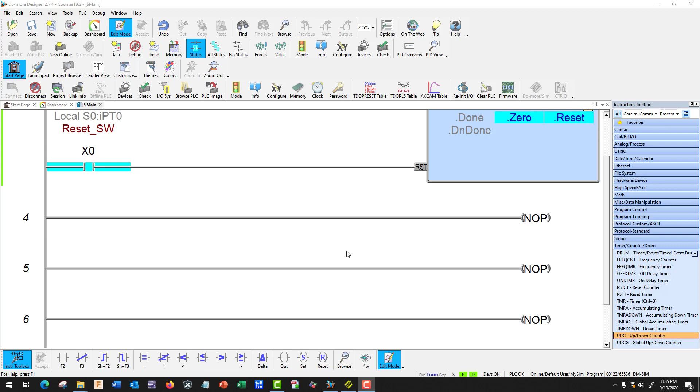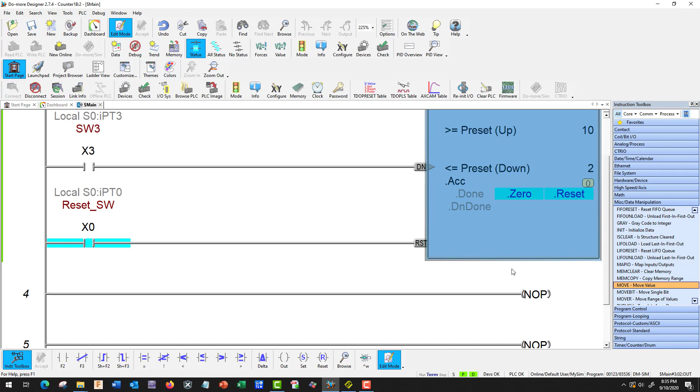Okay, we're back and I put it in program and I'm going to show you something new. So we're going to use data. So let's go ahead and we're going to use move. So we're going to move value. All right, so we're going to double click on that. Did I get it in the right place? Nope. Oops, I tried to go over top. That is definitely no good. All right, move value. Good.

So we have a source D0 and D1. D1 is a data value, so it's going to allow us to put in decimal numbers. So we're going to assign 8 to our D1 register. Okay, and the D's are going to accept decimal numbers. Okay, so I'm not going to call it anything right now, but we can.

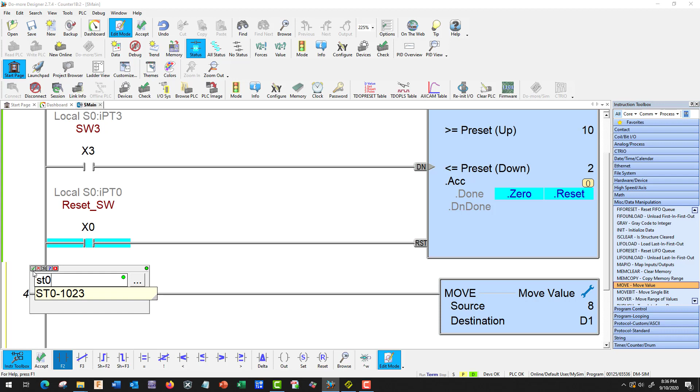So, all right. So we need to turn this on. So I could use an on and some other things, but let's start with the very first thing that we use. ST0. Now let's see if that's going to work for me. And yes, it is. This is first scan. So every time I start that, and that's why it was important for me to turn this to program mode,

is that PLC programs work one step at a time like a microprocessor. And this one, the first scan, is going to close this and it's going to move this value here. So if I was going to change that value, then I'd have to use an on or some other different kinds of thing. So what I want to do is I want to set this variable D1 to 8.

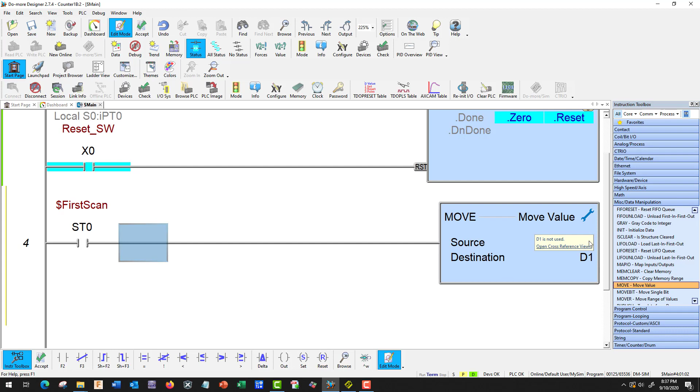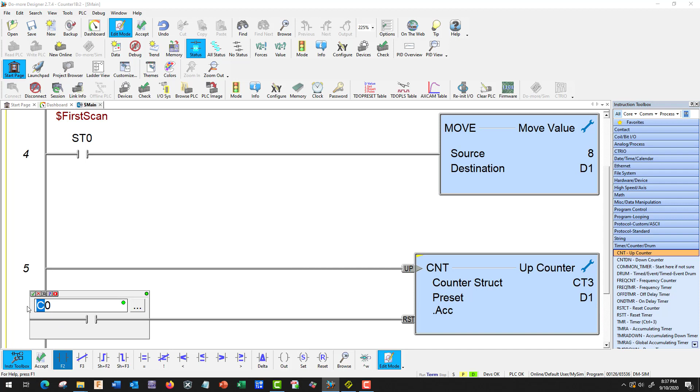Okay, so let's build another counter. And let's just use a standard counter. All right, we're going to call him CT3, and we're going to use our preset D1. Okay, and that's going to set that guy to 8. So again, let's use X0 as our reset. And let's use our next switch. We use X5. Hopefully I haven't used that before. It will warn me if I did. Nope, perfect.

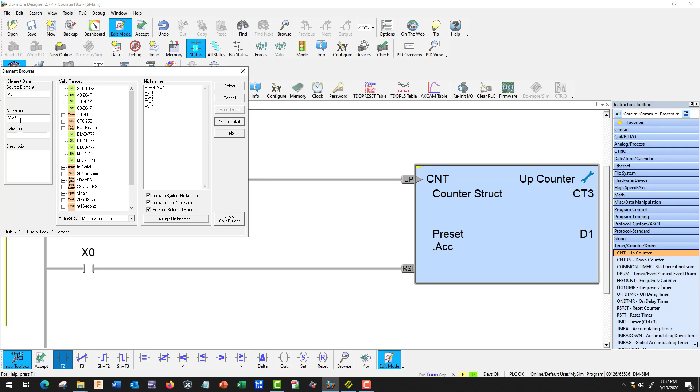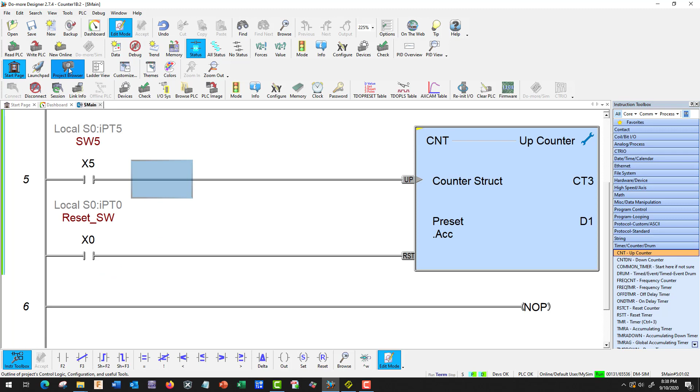Cool, so let's write select. Okay, we're ready to use this, all right? And what I'm going to show you is once we go to run, first scan, it should allow us to write over that. So we're in run. Good. And let's accept. Write PLC. And since I ran too early, let's go ahead and go to program. Go to run and get our first scan. Let's see if that's going to work for us. And it is. We have 8.

Good. So let's try it out. So let's turn off our reset. And we got D1 set. So let's count from 0 to 8. And it's X5. So when we get to 8, we should get a done. CT3 done. So it's working. Again, it's using our variable, and we can change that to anything we want. So let's go ahead and turn that off.

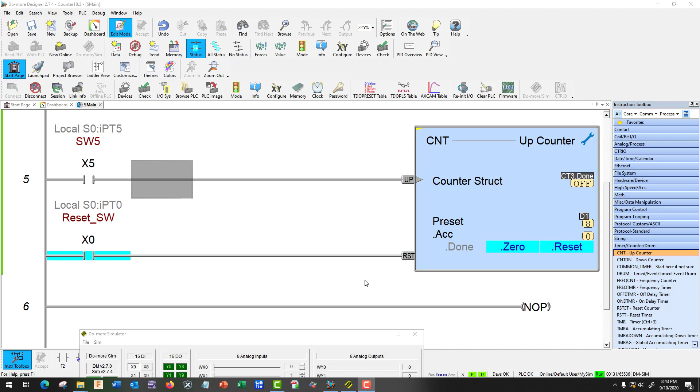Since I used ST0, I'm going to use another ST command. So there's a whole list of ST commands that are internal programs that allow us to do things. So I'm going to use ST4, open contact, and this one is a 1-second timer. So this guy is going to close every second. So let's just send him to the C0 just to watch him.

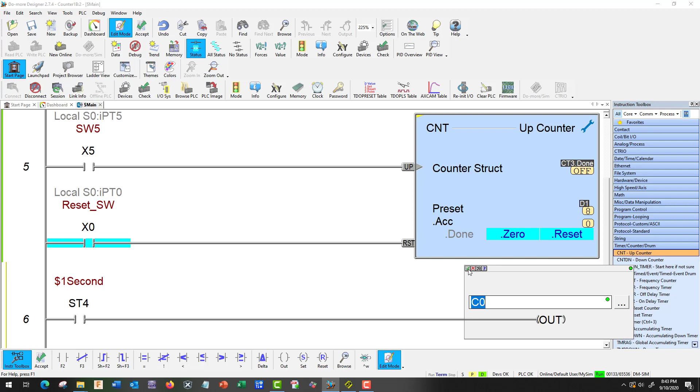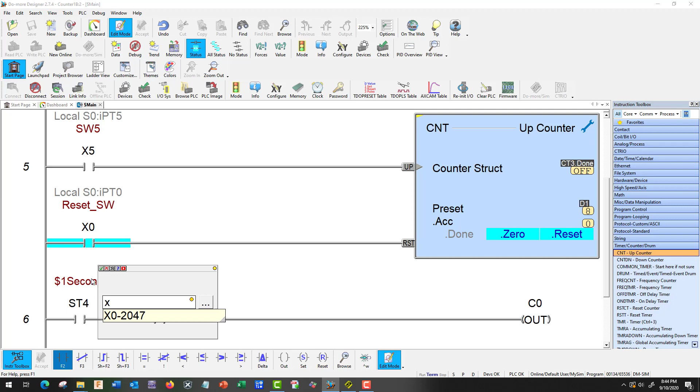Okay, so let's try it. And let's save it this time. Okay, good. And we're in run mode. Good. And you can see it flashing here. Let's turn this off. Let's put a switch in there so we could control it. Okay. All right, we put a little switch there so we could control it. So let's go ahead and put her back in run. Okay, accept, write PLC. Let's save it again. Okie dokie.

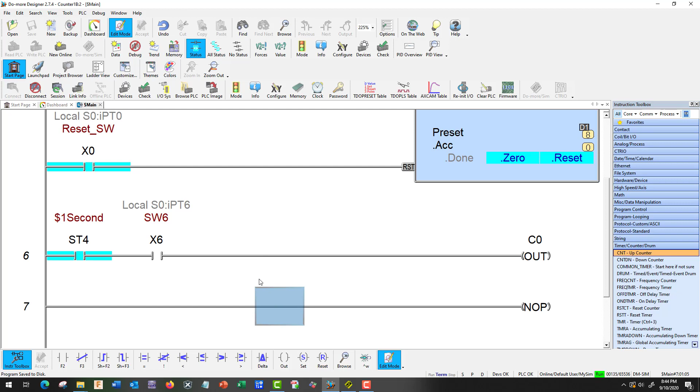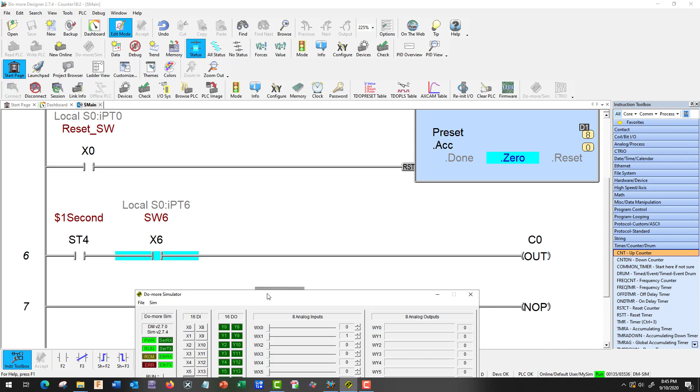So it's flashing, but it's not getting to our output because of our X6. So let's close our switch 6. Turn off our reset. And now we got an output. And you can see it is flashing bit C0. So this is a helpful control for if we want to flash something or take a look at data every 1 second or whatever. Good.